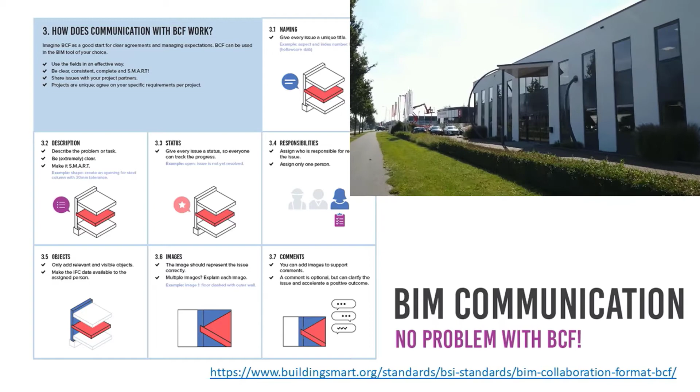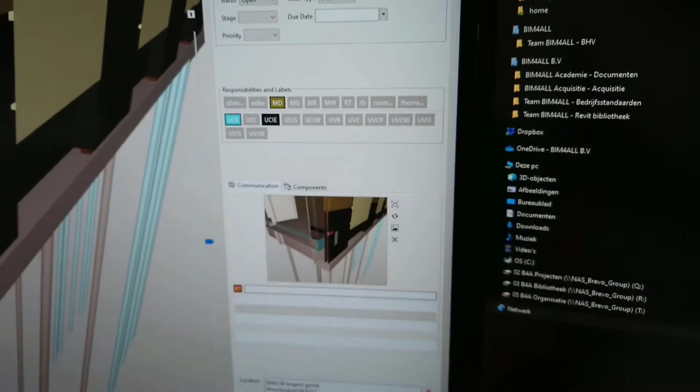Robert, you've made a use case from your office. Can you tell us more about this? Yeah, so this is our headquarters in the Netherlands. What you're going to see in the video is that one BIM coordinator is making an issue for a 3D BIM modeler, and is making the issue in Solibri, but it could also be Navisworks or another software product. He's making the issue and communicating with BCF Live Connector to send it automatically to the 3D BIM modeler. By using the right responsibilities, labels, and other extra requirements we wanted to add, it's going to be very specific what the problem is and how to solve it.

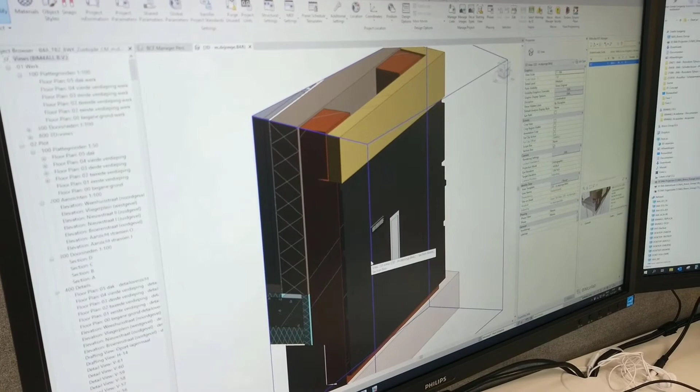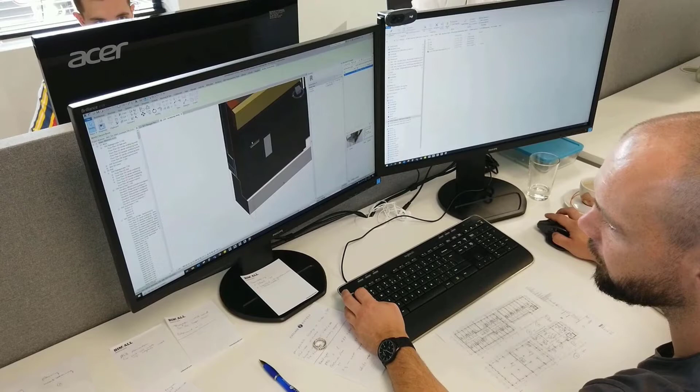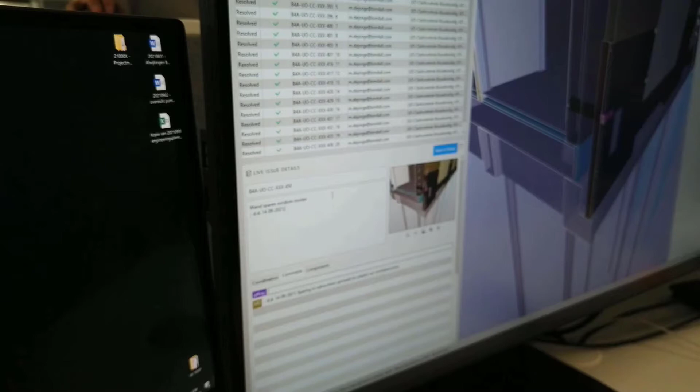What you're seeing here is my colleague using Revit with the BCF Manager add-in, the free add-in. He collected the issue online from a BCF server, and he knows what to do with the issue and how to solve the problem. After that, he will resolve the issue and send it back to the BIM coordinator to communicate that the issue has been resolved. Now we're going back to the BIM coordinator, who receives the comments and the resolved issue, and can close the issue if he's pleased with the comment, so the issue will be closed.

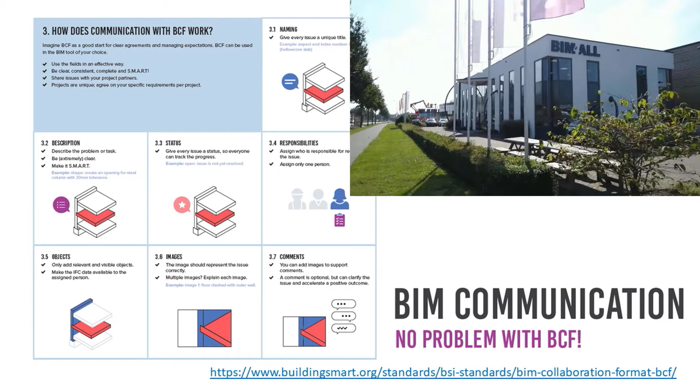This is a much faster way than sending each other a PDF or emails or whatever. We see that this use case is more like how it started with BCF, to be able to communicate these model check results. I'll show you later how it works when we use it on a construction site, but it's almost a similar process. Yeah, and that goes for us as well. We use the same process daily, and this new BCF chart will help us and our suppliers create even better issues for higher quality, to create better communication for all of us.

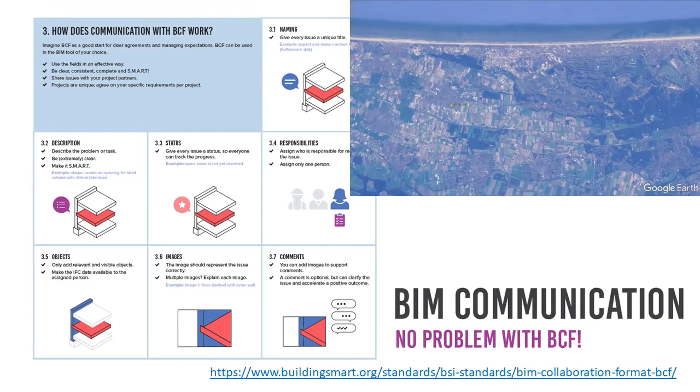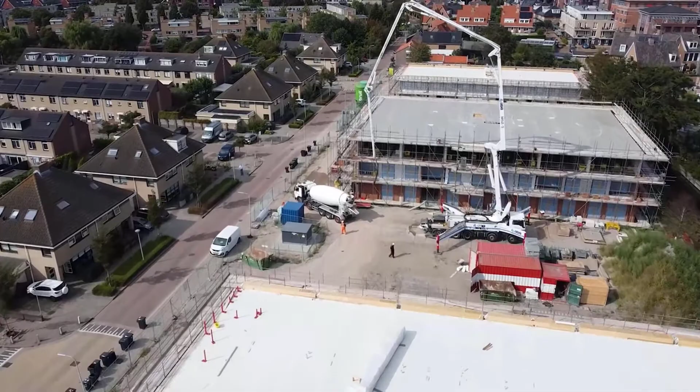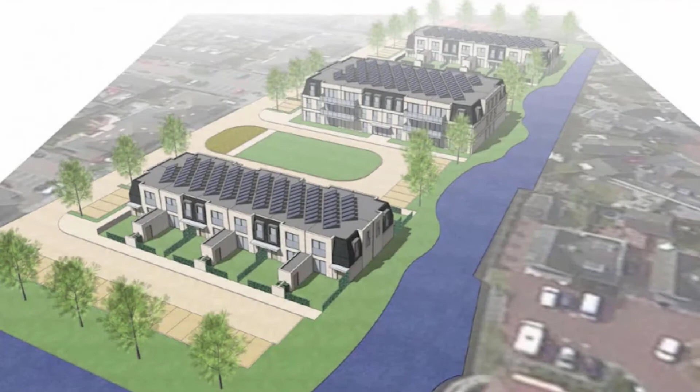So our project is in, well, you see Holland on its side. It's situated on the west coast, somewhere between Leiden and Haarlem. It's called Noordwijkerhout, and here you can see the construction site. In the middle you see the apartments, and on both sides there are 12 back-on-back houses. The situation is that construction is finished and the facade is now in progress. This is the original design, so you can see how it's going to be.

That's me coming to the construction site because a colleague asked me how to make an issue. He found a mistake that we have to resolve. So there we go.

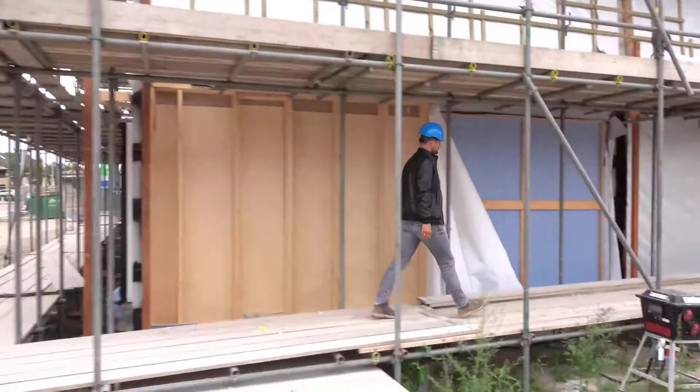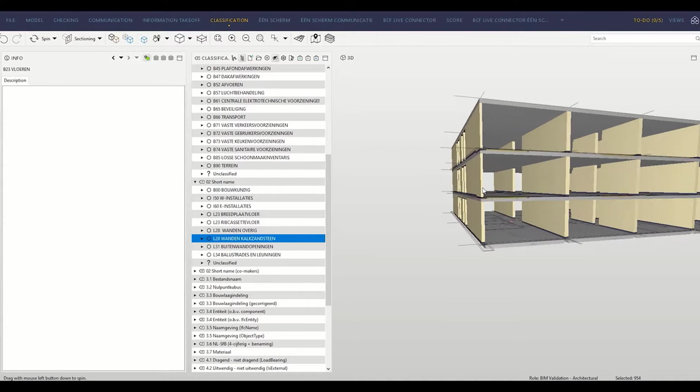Here you can see that the lime bricks were cut on site. So how does this look in the model? Here we are looking at the floors and the lime bricks from the suppliers. And there you can see that there's a, well, let's wait a little bit. When we zoom in, you can see there's a little space between the floor and the lime bricks. There you go.

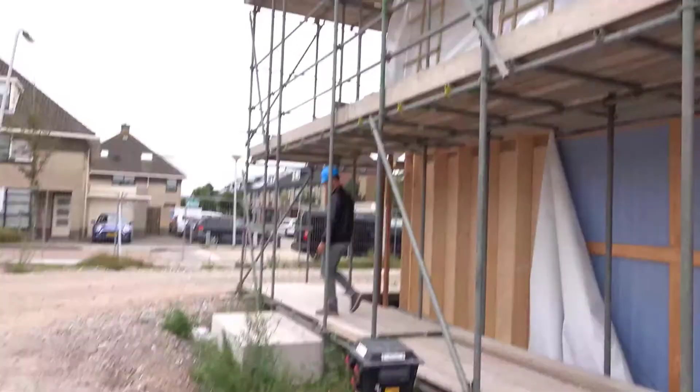Also, the lime bricks were situated in the model on a floor that is 220 millimeters thick, but in reality the floor is 180 millimeters thick. So that's the reason we had to cut off the lime bricks on site.

So now we go to the model and make an issue. This is the part where my colleague explains what is happening. So there he shows me that the floor is thinner than the original 220 millimeters, and that we had to cut off the lime bricks.

Okay, there we go. There we are going to make a new presentation in Solibri to put in the issue, and give the issue a name and a description. And then it's important to give the issue a status, because, and in this case we use the status active, because this corresponds with BIMcollab.

And we also assign the issue to a team member within responsibilities, because we would like the supplier to make an adjustment in his model.

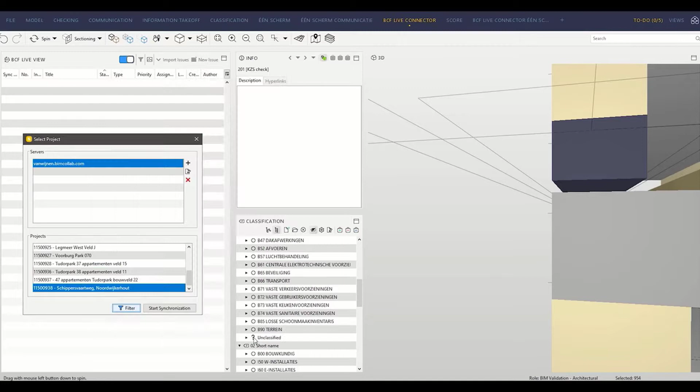Then we connect to the server, to the BCF server of BIMcollab, and start to filter the issues and synchronize them. So now these are the issues we have with the same supplier, and then we can add the issue to it. We have to do some value conversion, and it's done.

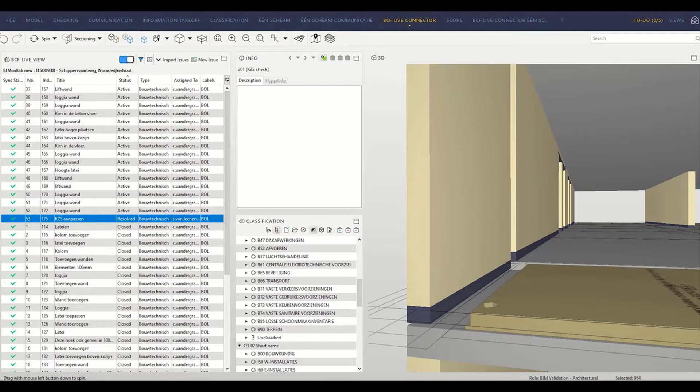And then now the issue is with the supplier, and then we have to wait till the supplier fixed the issue. So there you can see that the supplier resolved the issue and assigned it back to me. And there I can see what changed, and now it's time for me to get to work.

So yeah, first of all, we have to update the models within our main model. So there are our 3 new models from the supplier. And then we have to wait a little while to import these 3 models.

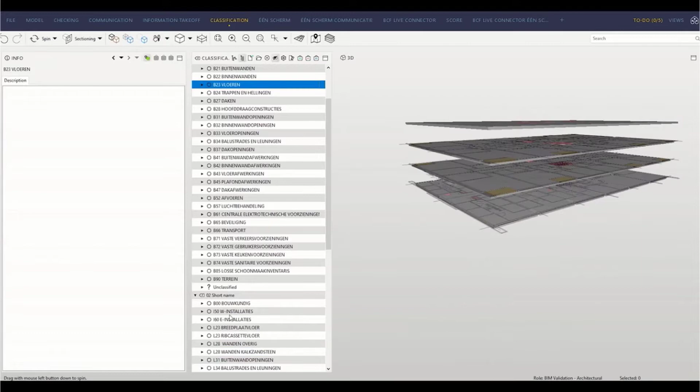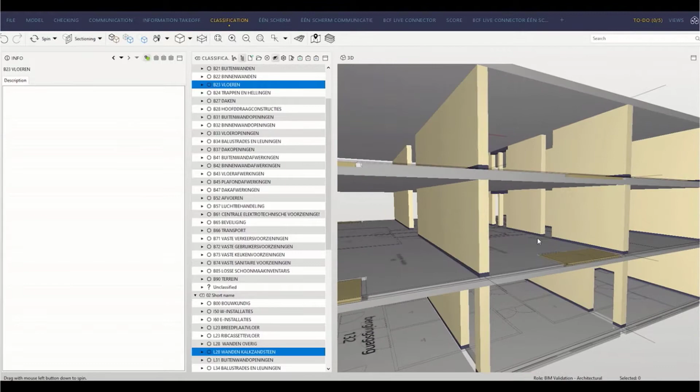So now we go back to the classifications, and we can use the same classifications for the floors and the lime bricks from the suppliers. And when we zoom in a little, there we see that the issue is fixed, or has the good height, and the lime bricks are as well.

So let's check this on site. Well, look at that. We have some thumbs up for the supplier, so now they can move on, on the construction site.

So now that we saw that it was okay, the issue is resolved. Then it's now time to change the issue status to closed. You see in the BCF Live connector that the issue is still on the status resolved. So when we go to the communication, there we can adjust it to closed. And then it's almost immediately synchronized to BIMcollab. And that's it.

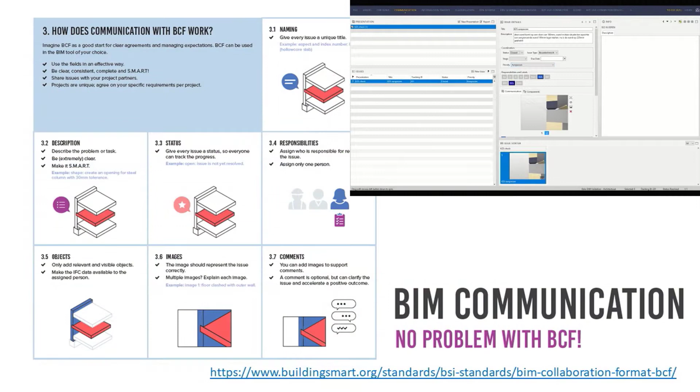Yeah, and this use case is more the second one, or the first one was with the design, with the architect, and now you're with the supplier. So you're communicating with the supplier for these limestone elements, right? Yes, it's a communication between the suppliers and the contractor. Okay, nice.

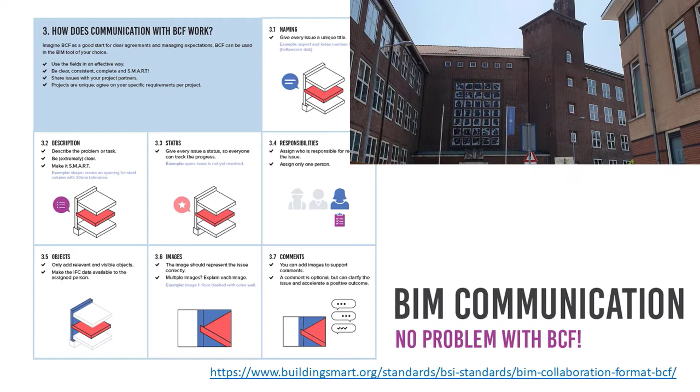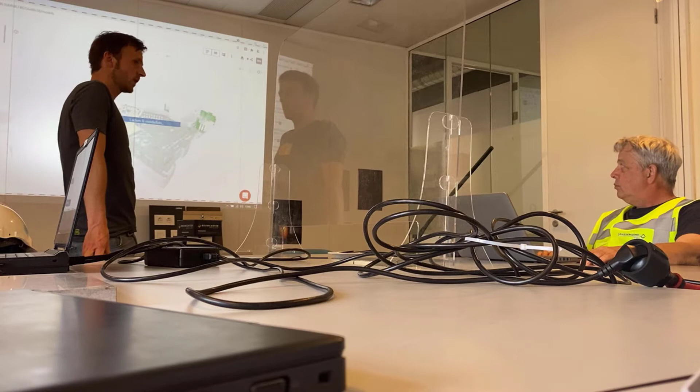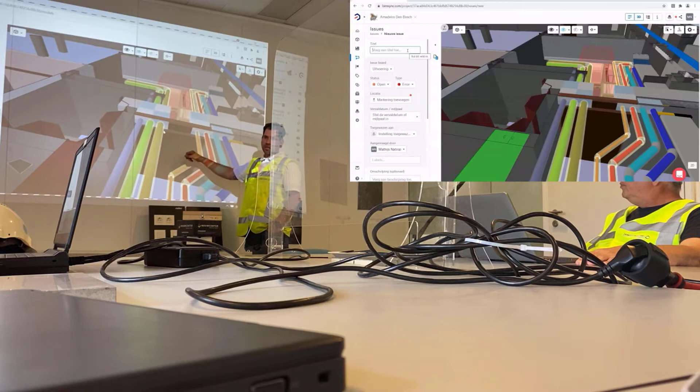We're discussing a situation, and within this situation, the site manager is explaining that there's piping going in a new situation, and there's an issue with something that was already there, and they have to make some adjustments, they think. But to make sure, they are going to investigate this on site. So this could be within the meeting.

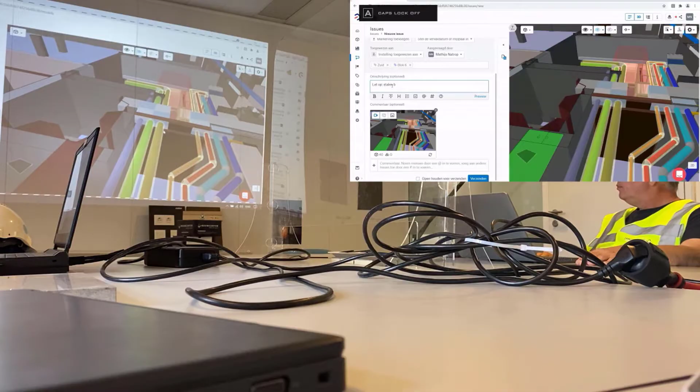We're creating an issue to be the start of this investigation. So within this issue, the most important part is that we describe what must be investigated, and we set this to the person that's going to investigate, but in this example we're going to investigate it altogether. So we've created an issue, and this issue is created on the CDE platform, the coordination platform, and the site managers can use their tablet or their smartphone to look at this issue from their app.

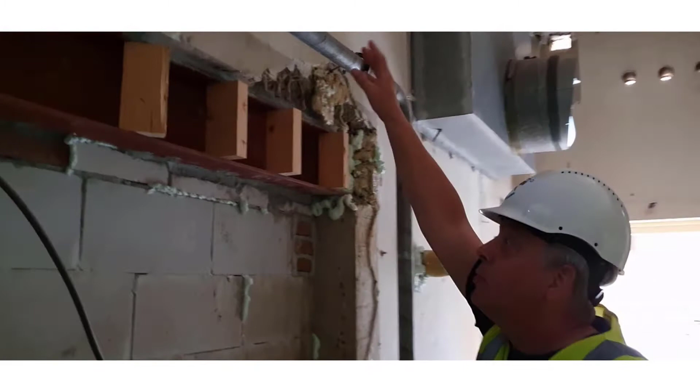So here we walk to the location of the issue to investigate this, and we see that there's a problem with this steel girder, this beam, and some new piping that should go to the other side of the wall. Here they're talking about where these pipings should be within the new situation.

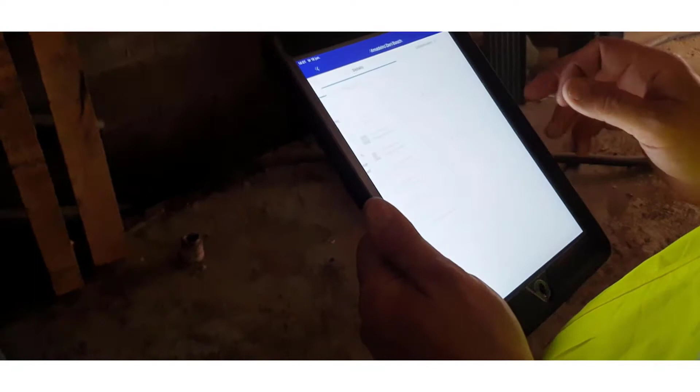To really rely on this investigation, you can reply on the issue, and in the issue we can see the image that was created from the platform with the virtual location. Now we add an image to this issue that has the actual situation. So now we're not using the camera position within the virtual building, but we're using just the camera on our tablet or smartphone to add to this discussion.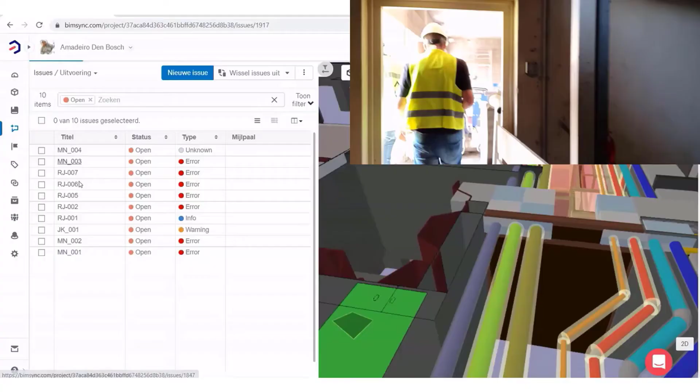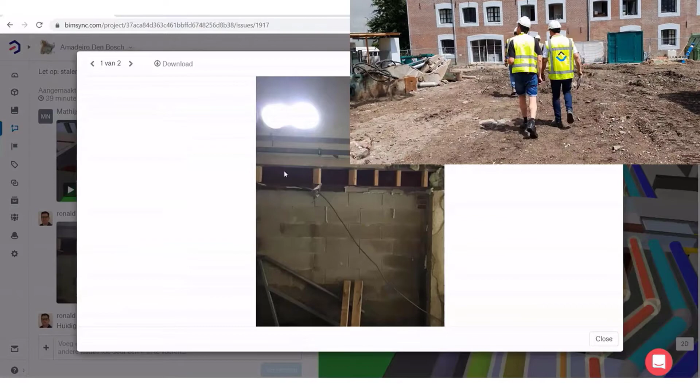In this example, a site manager creates a picture here, an image, and he adds this to the issue and puts in his comments about the situation. Once he's made his comment and uploaded his image, this image is directly available on the server, so someone else can look at this issue and the response, including this picture taken with his camera. While the site manager moves to his next issue or elsewhere on site, someone could be handling this issue with this picture and forwarding it to someone responsible for taking any actions on this.

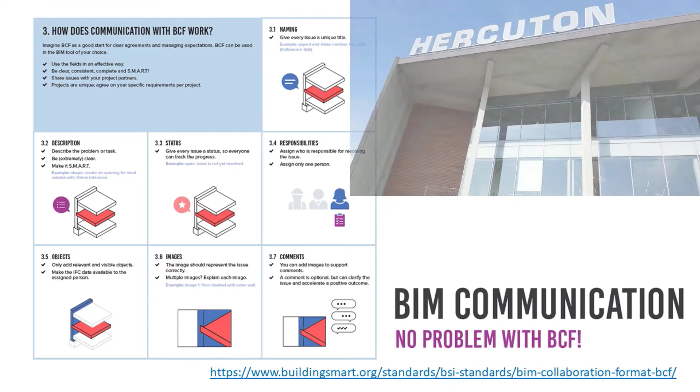So in this next use case, we use BCF in a little bit of a different way. Here we share and communicate our planned tasks of our primary process.

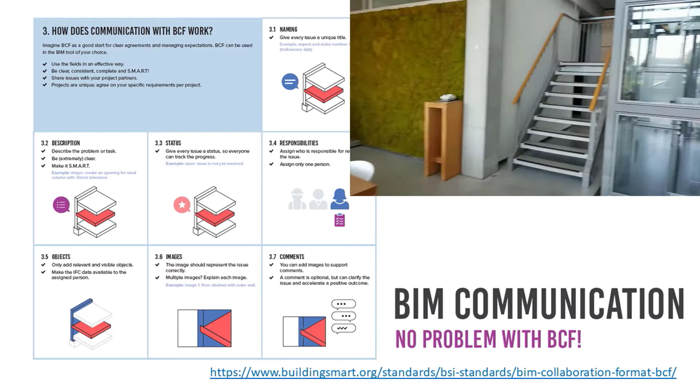Welcome to Hercuton. This is our office, and soon we'll meet my colleague Robert, who is working together with me on this. There you can see what we aim to do. So how do we do this?

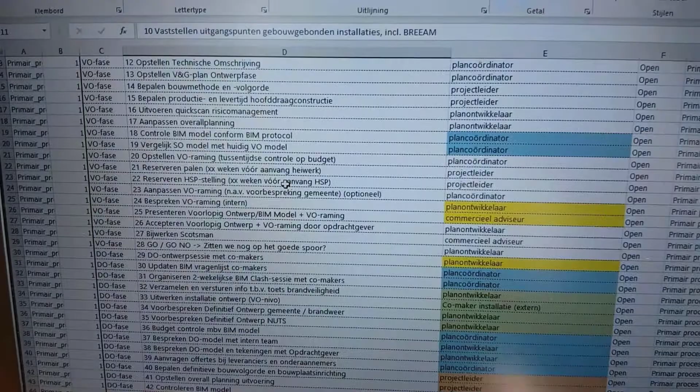Focusing now on our data-drivenness and our sharing of issues, we'll be focusing on the status and comments around those issues. So what we have here is an Excel sheet of all our tasks that need to be completed in our primary process of engineering and building.

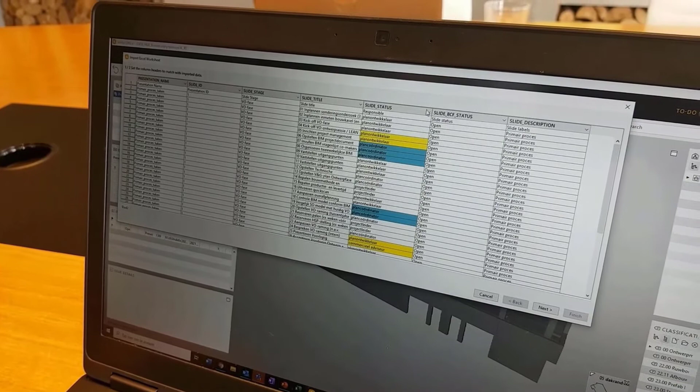That list is in an Excel file created out of our planning program, and that Excel file is then imported into Solibri. For Solibri to understand what we were doing, we had to do some mapping. So we're saying column A goes to column Z, and so on. By doing this, we can create a proper BCF file.

Solibri has an interesting feature for this, so we use this. Now see on the bottom left of your screen, all those issues are then created. There they are.

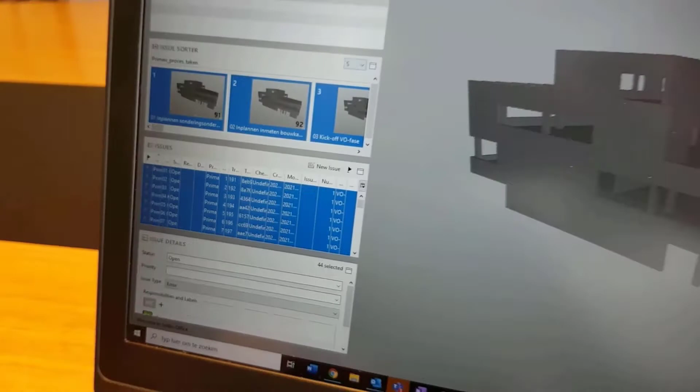So we need to get those issues into BIMsync. BIMsync is our platform where we share our issue management. This is cloud-based issue management and data-driven. Those are the things we're talking about just now. So we're looking for our project to import this into, and we synchronize, just like you've seen in the other videos before.

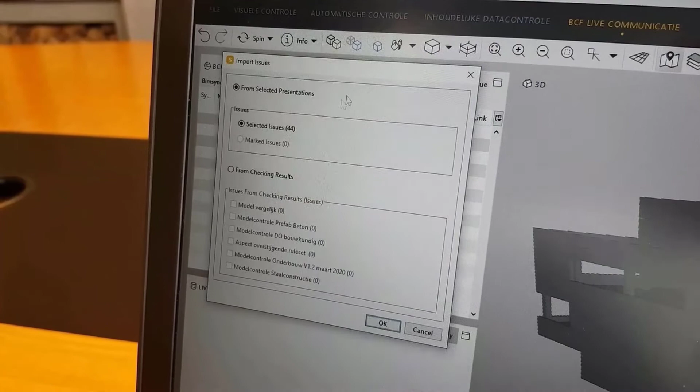We use the new live connector of Solibri, which is a great way to communicate issues in a data-driven way. Whereas before you could get issues into separate files and email them back and forth, and the communication was not so data-driven and not so easy.

So we've imported those files into BIMsync, our platform, and here you see all our tasks that need to be completed.

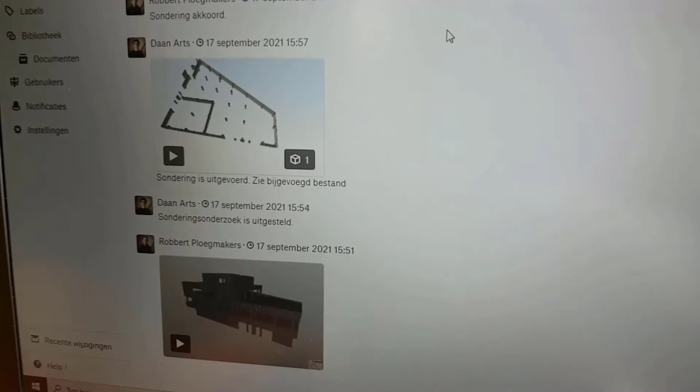So here we have a task, and the task says that we need to create a soil report. We have communication, we created comments on this task, and we also attached the document itself. I'm checking the document, it is approved by me, and therefore we can change the status of this issue to closed.

And we go back to the overview, and here we have an overview of all the tasks that need to be done using issue management. You see milestones, dates, responsibilities, labels, status, and using the dashboard in BIMsync, we have a complete overview of the percentage of all the tasks that need to be done.

They're primary process tasks in Dutch. 40 open, 6 are closed. So we're on our way in this project to be doing what we're supposed to do, and we use issue management to control our project.

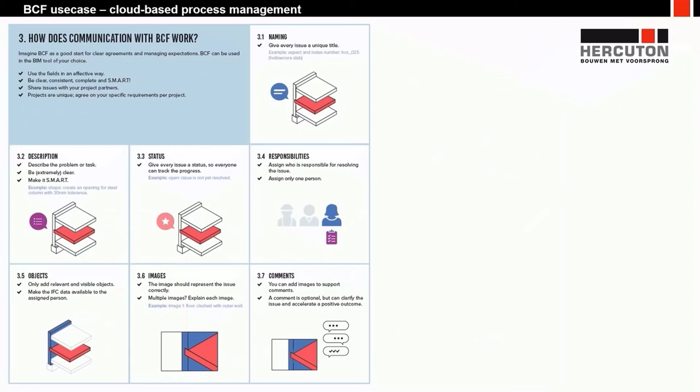So what we did just now, look at data-drivenness by transferring the BCF into Solibri and BIMsync, and using status and comments in our BCF to communicate these tasks within our project team.

So that's what we did. It's a little bit different than communicating on the building side. We use our tasks for our planning and use BCF to communicate this. So this will give an insight on a different way of using BCF, but maybe you are inspired to do the same.

That's such a good example that we are going to use it as well, Daan. Thank you. You've opened his eyes to a broader view on BCF, right? So more collaboration, even within our team. That's what BCF brings, more collaboration, teamwork, and knowledge.

Because we introduced the chart here today, let's hope a lot of people start using the charts, so the quality of the issues improves, communication improves and becomes more centralized, and that's what we're trying to achieve here today. So let's hope we can do that together. And also that people not working with BCF hands-on get to know its value so they can implement this on their project.

So by wrapping up this video, what you saw was that we are using the tiles like you see here on the screen. Using these issues, you see that the emails drastically decrease. So yes, it's very helpful. Less email, that would be terrific, right? No single direction lines from one to another, but more open communication.

Yes, we are also seeing fewer emails with one-line issues and snapshots. We wanted to have the information centralized, and that's one of the benefits of using BCF and the BCF Live connector with an online server. With my video, you saw that you can also use it within your own company as a form of communication within your project team.

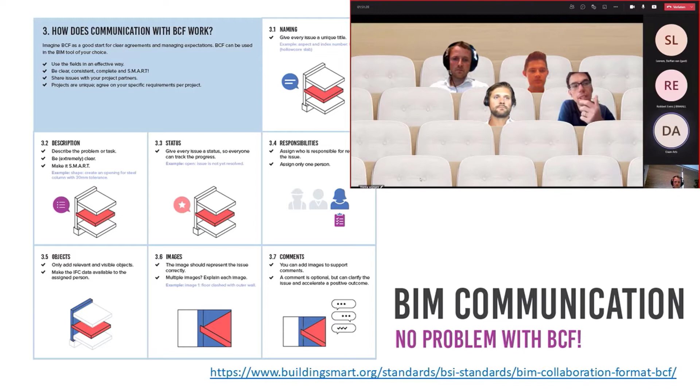We did it a little differently. We're talking about tasks instead of clashes in our models. So our naming in our case was literally the task. We described the task using the description. The status was either open or closed—you either did something or you didn't. Responsibilities in these tasks are obviously very important, so we used those as well.

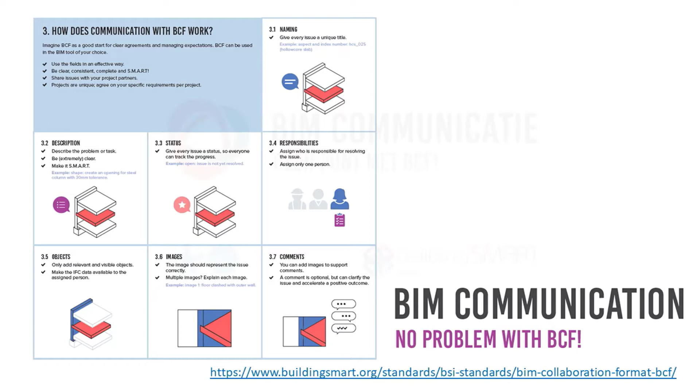As Robbert also mentioned, when we add objects to the issues, the suppliers know what to adjust in their models, and that gives a lot more value. So he doesn't adjust the wrong wall. Is that what you're trying to say, Steffan? Yes, that's what I'm trying to say. Thank you, Mathijs.

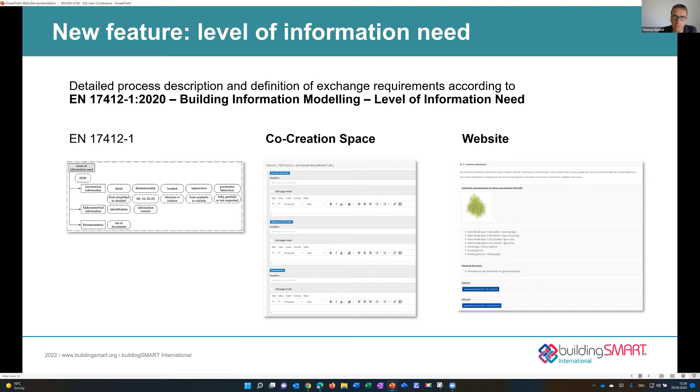You can upload some pictures about the geometry, for example, all the necessary information and the documents. And of course, you always see where this exchange happens between the initiator and the executor. So this is a new feature, very nice to use.

Another possibility we gave just recently to our partners to support the use cases. We introduced a new section, software tools and services, where software vendors, for example, are going to use the use case management for a specific application and develop an application for this specific use case. They can be highlighted here on the platform itself.

And to improve the visibility on the use case management, we introduced a service where you can embed your exchange requirement directly into the platform. So we are going to use here a Smartsheet application. If you are interested to use this one, please contact me.

And we just recently made a test in Switzerland with a service called BIM Profile Server, to create an information delivery specification. What you see here is kind of a workflow. So we have the core elements of a use case: the use case description, the process description, and the non-technical information exchange requirement out of the definition from the information delivery manual. And then with this exchange requirement, you create kind of a profile in this BIM Profile Server and can then basically download the information delivery specification, which will be available on the platform itself. I'm going to show you this live also on the demo.

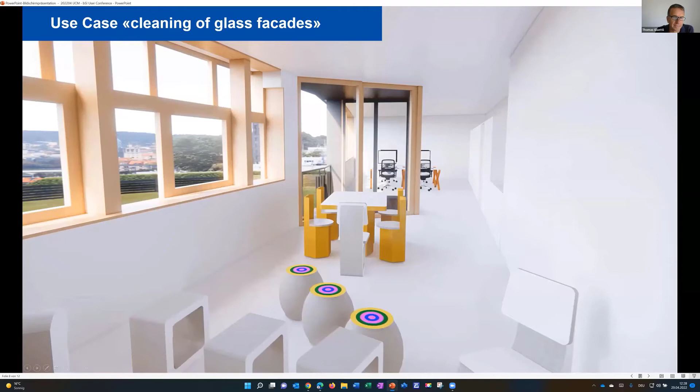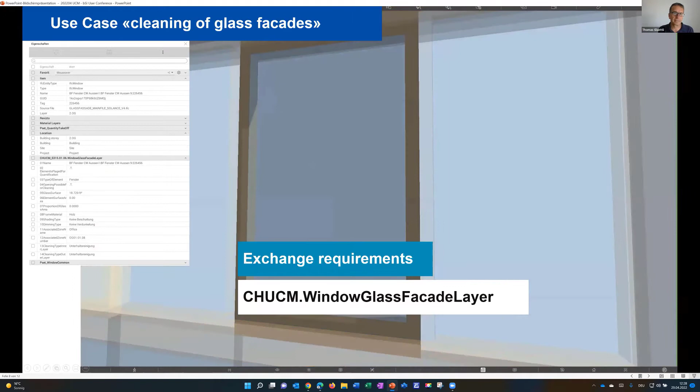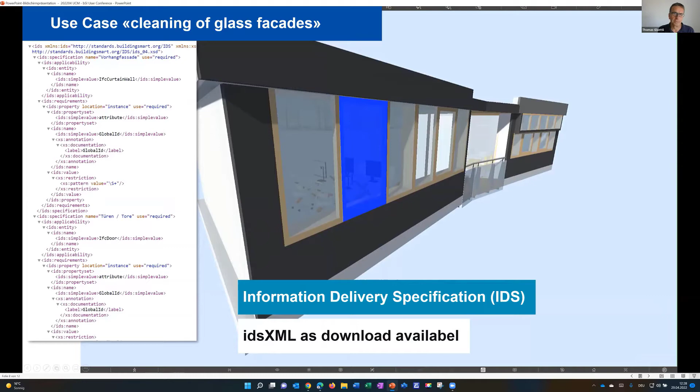I'd like to start now with a specific use case, very nice to explain because it's an easy one. Here we developed a use case, cleaning of glass facades. The objectives are that you have all the information for cleaning glass surfaces in a building. We create these exchange requirements out of the process from the project teams, and after that, in this profile server, we create the information delivery specification. So this is kind of the workflow we have here.

How does this look like? I will do a live presentation here, it's maybe easier to understand for you. So what you see here is the use case management tool.

And here you have basically the introduction side. You see the single sign-on and all the use cases, and then you can filter the use cases, for example for English use cases. And here you see all the numbers of the use cases.

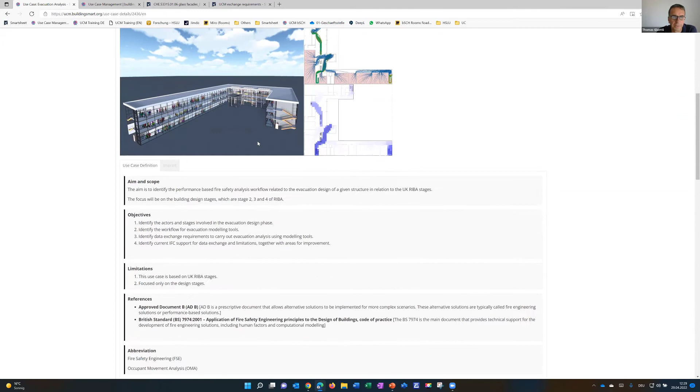Some best examples maybe. So here from the building room, I'll give you an example here for the evacuation analysis. You see always a use case has these three sections: the description of the use case with the management summary, a definition, maybe an illustration, then always aim, scope, objectives, limitation, and references.

And then in the second phase, you have the process definitions, and the process definition can be according to the different phases, for example development, design, and so on. So everybody can follow exactly what will happen here. And then the third element is the exchange requirement here in an Excel sheet, done and explained very briefly.

So this is an example from what you see here from buildingSMART International, from the building room. But we have also other examples now from this BIM Speed project here. So you see here also BIM Speed. This is the EU Horizon project with the lighting and visual comfort analysis, also here very detailed, but in the very same structure, explaining what is to do here on this specific use case.

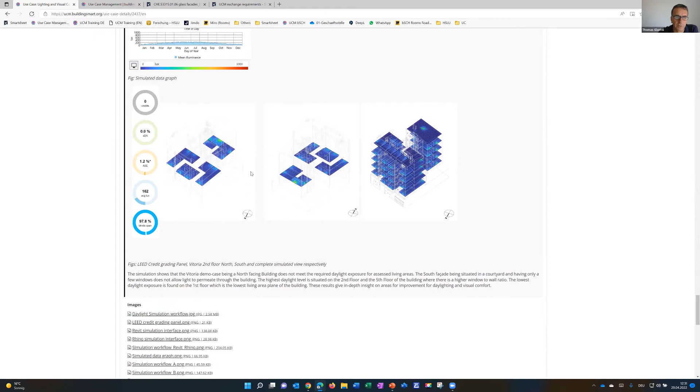So this is, you see, it's quite a long documentation, but it's very detailed and very well explained what you have to do. So you see basically a use case is not only the exchange requirement by the end as a result, but a very good explanation of what can happen and what you have to do to create and to execute basically a use case.

Last but not least, I'd like to show you this cleaning of glass facades now. Again, first we made a description here with some pictures on what the use case is about, so it's better to understand for cleaning of glass surfaces inside and outside, for example, of the building. Again, this very clear structure of what you have to do, some references, meaning what kind of standards you're going to use here.

And then here you see the process definition. Of course, the process definition is a picture, but you can always have it as a PDF as well, so that you can see what is really happening on this use case. You see on the lines here, on the swim lanes, these are the different actors, and then you have the different phases here. So we have four different phases, and you see then what is the exchange between the different actors. We highlighted the exchange requirements always with the blue icon here.

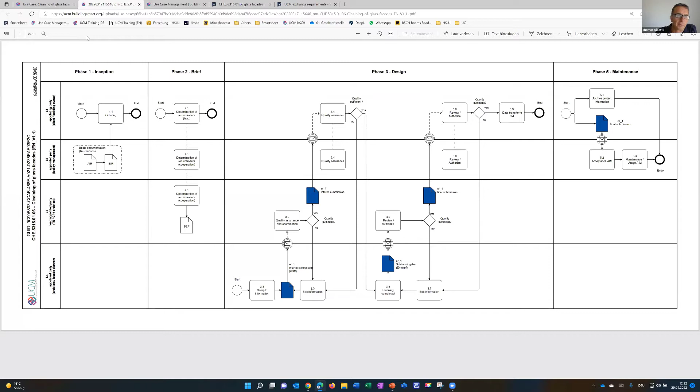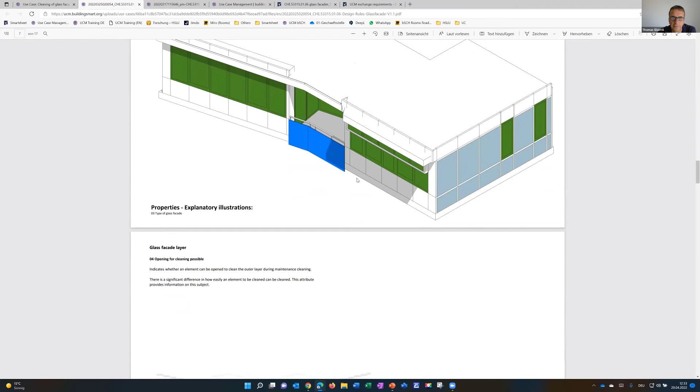As I said, it's always kind of a recipe how you have to execute the use case. So you see here step by step all these design phase elements, described in a very detailed way, so you know exactly for each step what you have to do, and you can explain that and make it available for public. Then we have the design rules inside this use case, with an explanation but also very detailed rules. This depends on the team developing the use case, how detailed they want to provide the information. But I think here it's very clearly and well explained what happens in this use case.

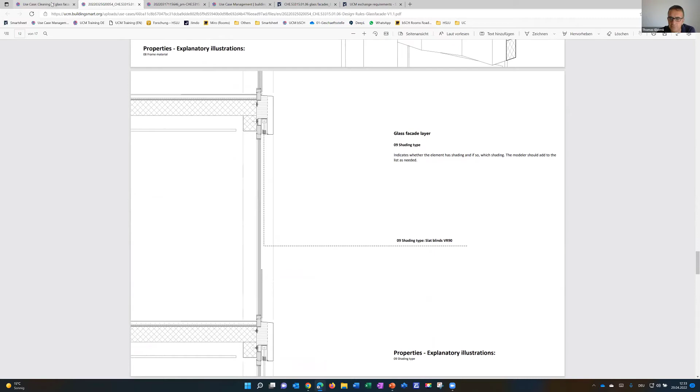And by the end, you've got the exchange requirement. What you see here is we have this Smartsheet embedded into the platform, so you can really see. Here is, for example, the result out of the working group. They said, okay, we need these kinds of properties here. They did some more details about definitions. So this is what the project team did.

And then we did a mapping to IFC 4.3 so that we can use this use case later on for an IFC exchange. With this, we went into this BIM profile server and created, by the end, an IDS file. Here you see the IDS file, and this file is also available as a download, so it can be used by different software to execute this use case.

This is what happens on the front end, available for the whole BIM community, so everybody can access that. But I also like to give you a short insight into the backend, this collaboration space. How would this look for this same use case? So, cleaning of glass facades.

You always see some metadata here, and then you have the core elements: the use case definition. So this is the description, the process definition, the exchange requirement, and a section for the software vendors, and the change log.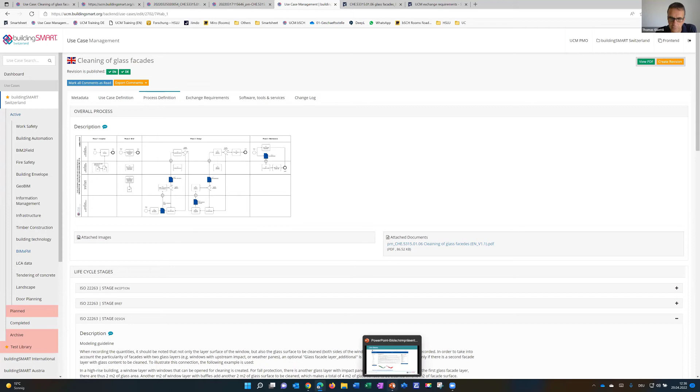Coming back to my presentation, by the end, what we have here for the use case management, we also use quality assurance tools. For example, this is the qualifier. Let me give you a short insight here.

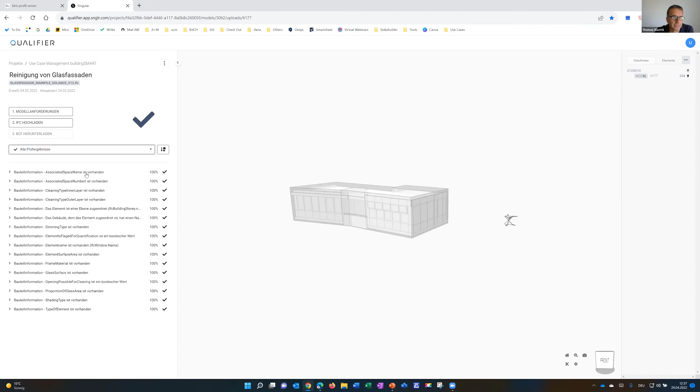So this is the qualifier, where you can check all the classification, and you see here all necessary parts are now 100% assigned to the model. Our intention is really that you have a validation tool for each use case so that you can do your quality assurance.

So I'm coming to a short outlook. What is next for the use case management service? We'd like to integrate a kind of IDS editor, a light editor, which is able to communicate with the buildingSMART data dictionary, and we will have a UCM domain in the BSDD so that we can publish the results, meaning the property sets we create for the use case, also available on a domain.

And then we will collaborate with different external providers, from property servers for example. The example I showed you was this full IDS client, where we can really create an IDS out of a service, and then import the results, and export the IDS for your software.

Yeah, that's all from my side. So if you have any questions, I'm very happy to give you an answer on that.